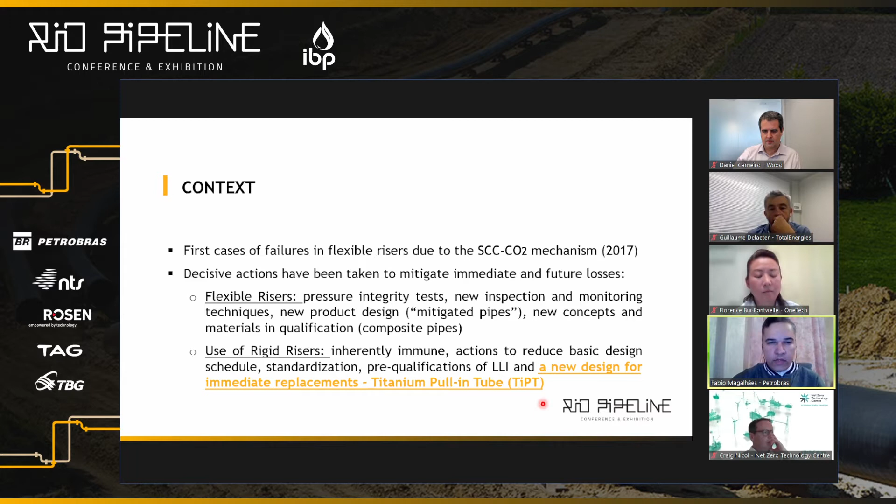And for the replacement of flexible lines with problems, we developed this new concept that we are calling titanium pull-in tube, or TIPT. This technology is based on the titanium stress joint technology, of which several are already installed around the world since the 90s.

Several aspects of this technology are based on our experience with flexible riser design in terms of interface with the platform, the balcony and the support interface and the top hang-off interface, and some testing for the material and the coating of the flexible risers.

But also we carried out an extensive feasibility study on the TIPT technology inside Petrobras, with several tests, studies and computer simulations to be sure of some outstanding points related to this technology. We had an interaction with the market, both suppliers of titanium stress joints and also installers, to bring their valuable suggestions and experience to our design.

And all of this we consolidated in a technical specification where we put all the results of the study on design, fabrication, inspection and monitoring that we had learned in these previous years.

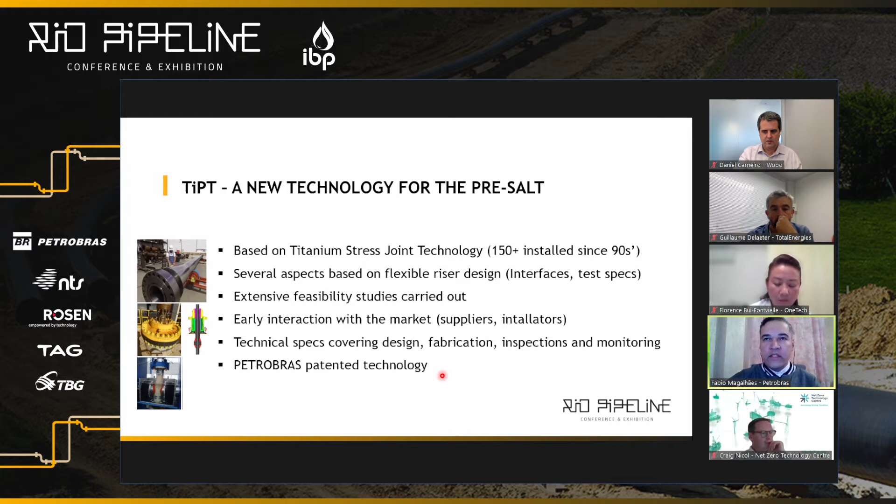And also, this is a patented technology from Petrobras. That doesn't mean that we will prohibit it, on the contrary, it's just to safeguard our intention to continue using this technology. And what is the TIPT? It is a top section of the rigid riser that is made of titanium.

We have the TIPT, titanium string here, that is welded on the rigid riser that we know from the previous projects. And we have here two stress joints that we call the lower and the upper stress joint. The lower one is necessary to resist the dynamic movement of the platform here on the bottom part, and the upper stress joint is used to resist the permanent bending of the TIPT in the passage on the support, completed with titanium pipe section connected with flange.

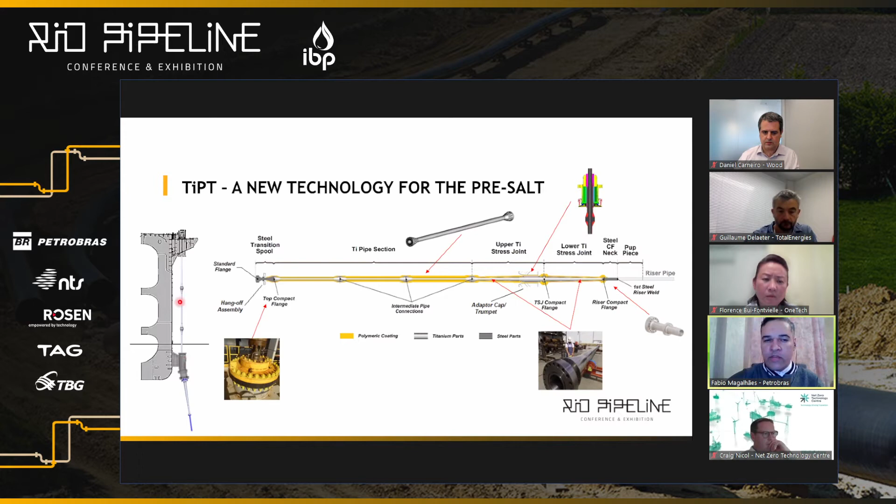And both terminations are made of carbon steel pieces that are internally cladded to resist the fluid contaminants, and also the interface is based on flexible riser technology. The idea is not to have a modification on the support and the platform anyway. And the advantage that we have is a definitive solution immune to the SCC-CO2 phenomenon, like the rigid riser with CRA, corrosion resistant alloy inside, and the titanium itself is resistant.

This technology does not require production or injection stops to perform the integrity tests, so we gain time. We don't need this. It reduces the risk of failure on the annulus fluid, because it doesn't have this problem. This is for new projects. The technology doesn't require modification on the platform, the support and the pull-in system compared with a full flexible design. So it is interchangeable with flexible and rigid projects by using TIPT on the top connection.

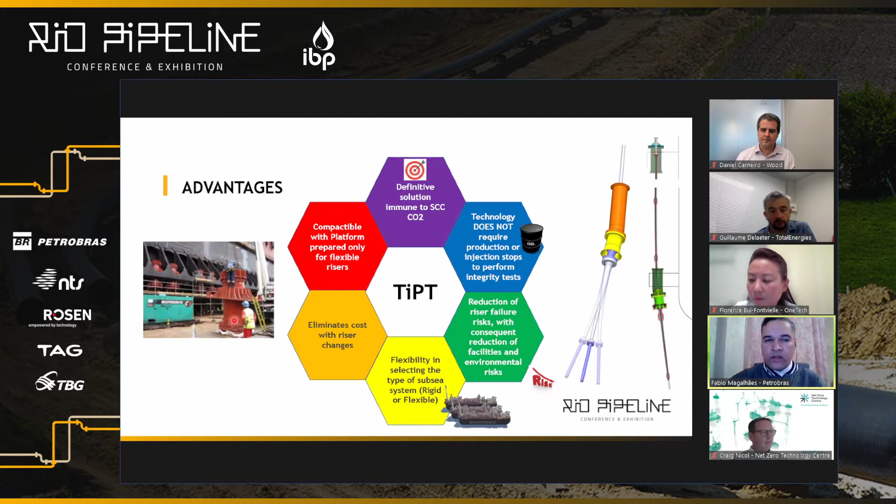It also eliminates cost with the riser change when the flexible risers don't support the load and are seriously damaged, and it is compatible with platforms prepared only for flexible risers. The support, then no spool hard pipe here, no auxiliary system also. It's not needed for flexible riser and not even for TIPT riser, rigid riser.

But we have some outstanding technical issues that we have to address, and we did that. Here is the list: the inner diameter up to 8 inch. That doesn't mean that we couldn't reach more, but the more we increase the diameter, the more the stiffness of the titanium piece increases and induces more loads on the support. And there is some problem, so we don't have to reach much more than 8 inch inner diameter.

For gas injection and oil production lines, which are the target of this technology's main use, we have some contaminants beside the CO2, the sulfide content, and the high temperature that lead to using the more resistant titanium grades to resist these conditions. And also the use on highly dynamic floating units, the FPSO, since the use of stress joints is normally on more static units like SPAR, TLP, even semi, but not normally on FPSO, so we had to address this question on the loads and fatigue issues on the top of the riser and the support.

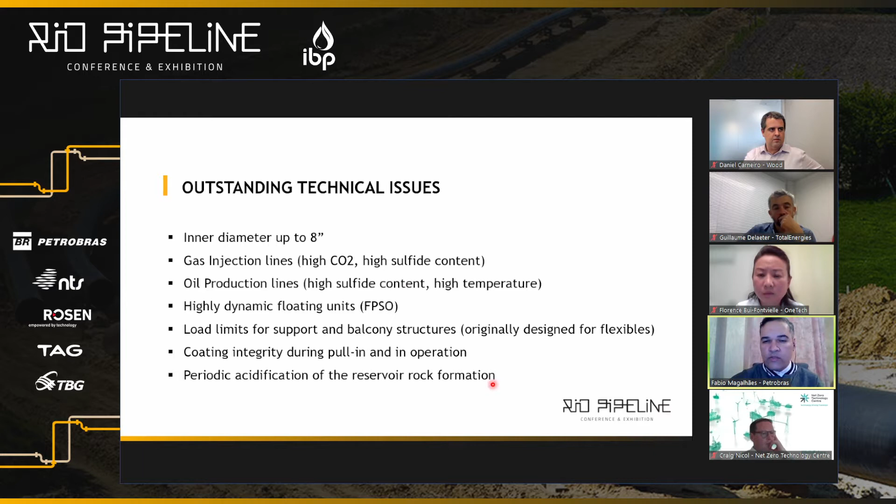And the periodic acidification of the reservoir, where we use inorganic acid which is stronger, like hydrochloric acid, and the compatibility of the metal has to be checked, and it was. But also we made several evaluations on riser global analysis, the configuration of the projects that we proposed, a configuration that is suitable for the field, and staggered risers to minimize the risk of interference, using optimization software to reach some configuration and also the stress joint

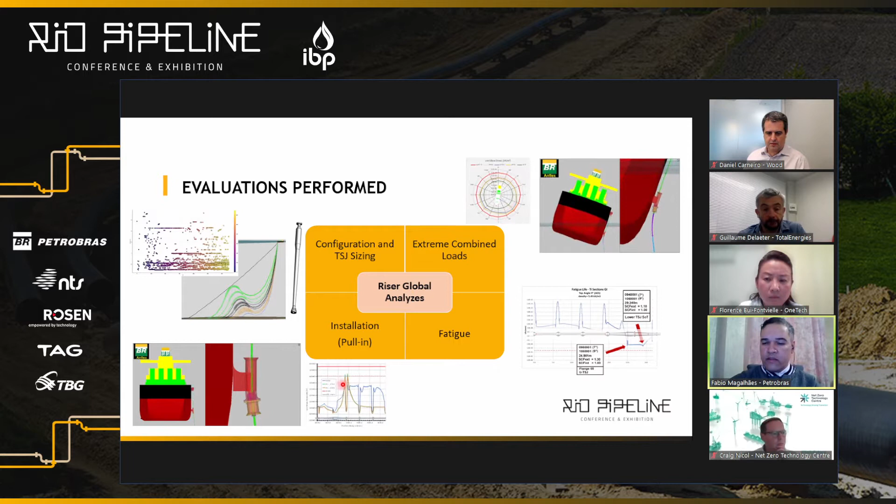dimension. We performed the extreme load, combined loads analysis with several cases, accidental, extreme and operational cases, and addressed fatigue analysis of the riser. Here is a figure of the top of the riser, the TiPT string, where we made a detailed fatigue analysis on this part to be sure. And also the pull-in analysis, when the TiPT is bending during the passage here, and we need to check the utilization for this scenario.

Also, among the components of the TiPT, we had the compact flange, which is a flange designed for dynamic use. There are ISO standards that have the sizing of this flange, but we had to check also to be sure that it is feasible.

The pressure contact on the coating of the TiPT, to have an idea of the loading level here, to study the suitable coating material. We made also ECA on several sections of the TiPT to study the possibility of using welds there, and also the pull-through, where we analyzed the final stage of the decoupling of the TiPT, the upper stress joint, when we have our overload here during the alignment, and also an increase of the pressure here.

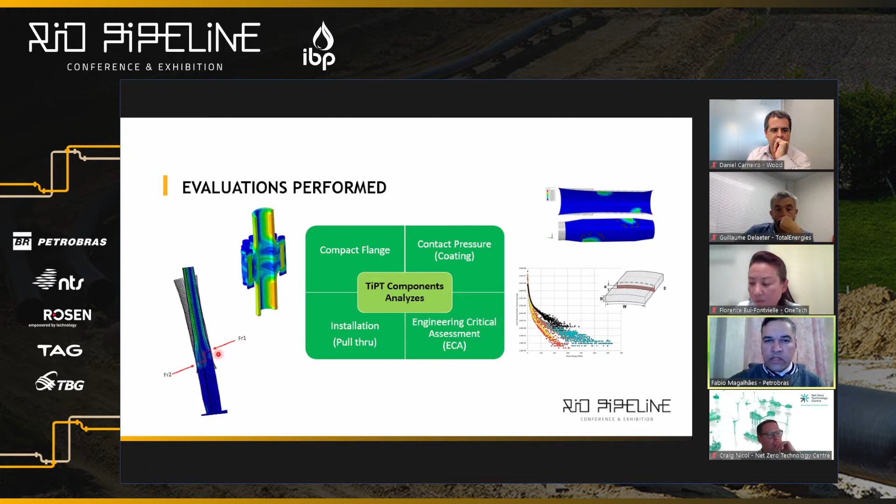It was checked also. And on the FPSO side, as the FPSOs where we intend to use TiPT were prepared for flexible risers, we also checked the balcony structure, the structure itself for each of the balconies of the FPSOs intended for the projects, and also the support structure; the bell mouth of the support is checked for structure, strength, and fatigue also.

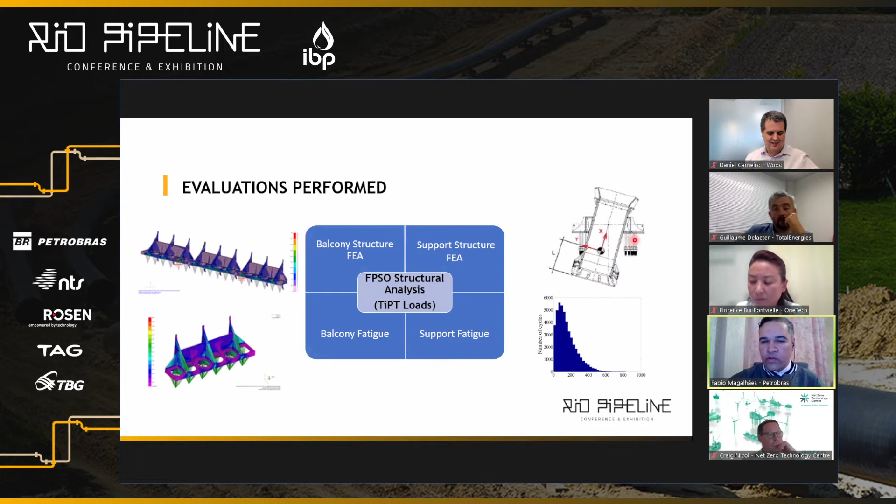And all this resulted in a specification; I listed here the main requirements that we have there: that we use an alloy that is grade F29, resistant to sulfide content and strong inorganic acids also. We specify also unwelded stress joints due to the high dynamic movement. It's hard to inspect by UT during fabrication, so we limit the length of the stress joint for this reason, and the minimal yield strength to overcome the loads that the TiPT is submitted to.

And also for the coating, we specify the wear testing, tribometer polymer pair, and also the full scale test to ensure the feasibility of the coating.

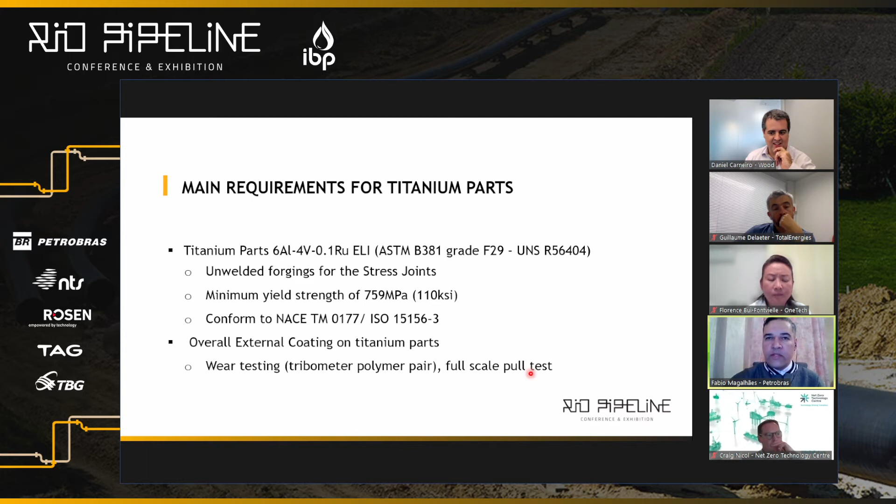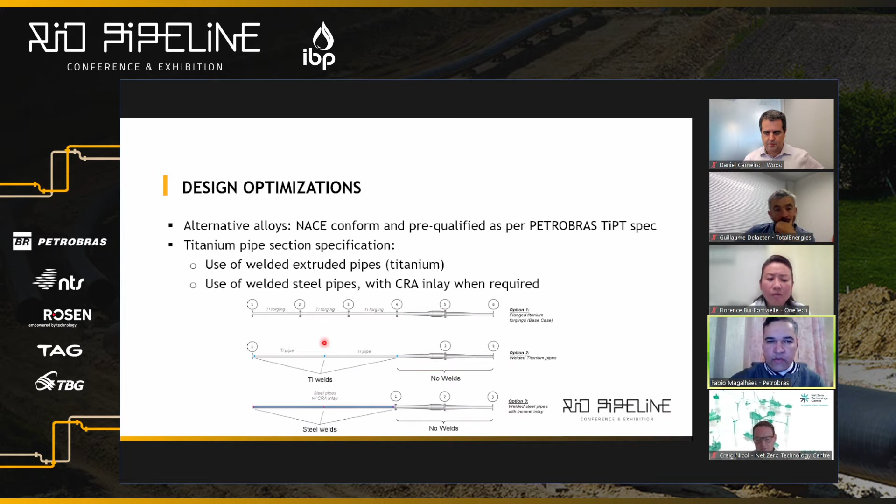Okay, thank you, Daniel. Also some optimizations are being thought of and will be specified in the next project: the use of titanium pipe welded on the static sections, or steel pipes here, reducing the number of flanges and the cost and lead time for this equipment. We have already contracted one project with 5 platforms and 11 risers, or 11 TiPT. It is on the way already.

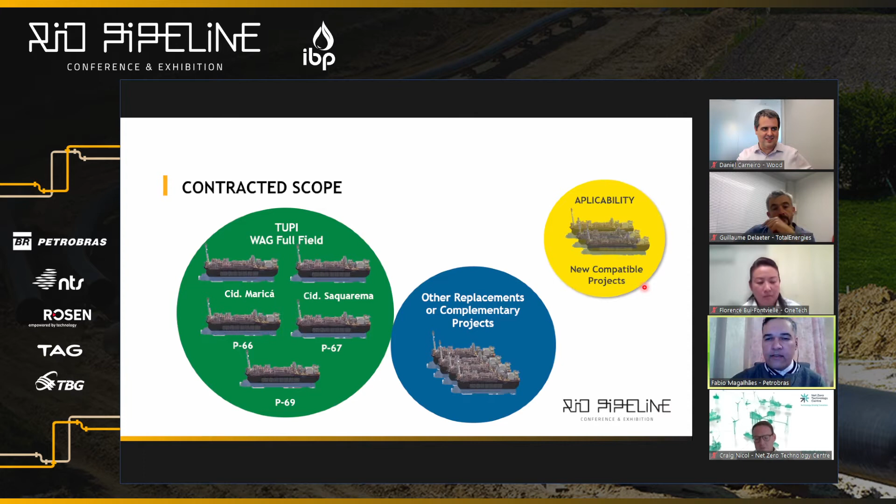Some other replacement or complementary projects are also on the way in basic design. And we are also studying the applicability for new projects, weighing the risks and gains of this technology for new projects.

So in conclusion, we can conclude the excellent SCC CO2 resistance of this technology to replace the flexible riser. It's suitable for installation in FPSOs originally designed for flexible risers. The studies all showed this. It increases the safety of the operation because it eliminates the risk of failure of the flexible, and production and injection loss during integrity tests.

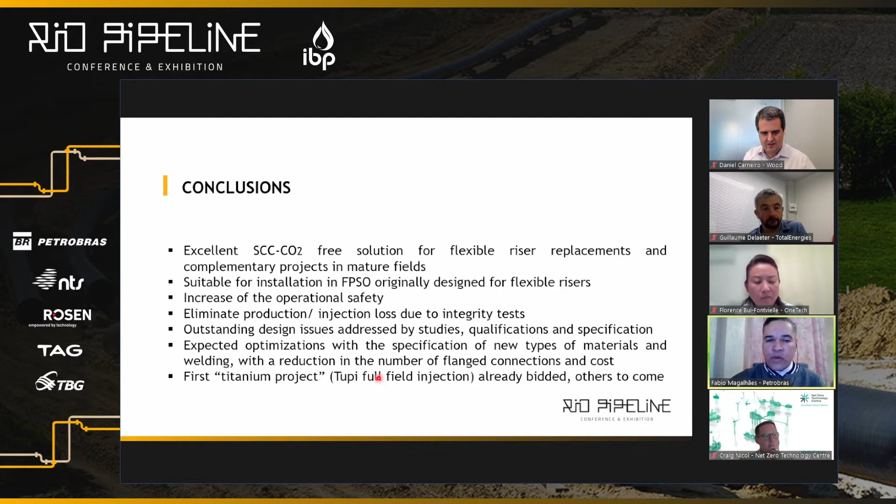All the outstanding issues that I said were addressed through study and qualification, and were also always included in the specification. And we have this expected optimization that we will specify in the next version of the specification, which is expected to reduce costs. And this first titanium project is already bid, and others are to come. So that's it. Thank you for your attention.

Brilliant opening paper from Fabio. I have to admit mine's going to be a little less technical and a little bit more of an oversight. So here goes. But thanks, Fabio. That was really interesting.

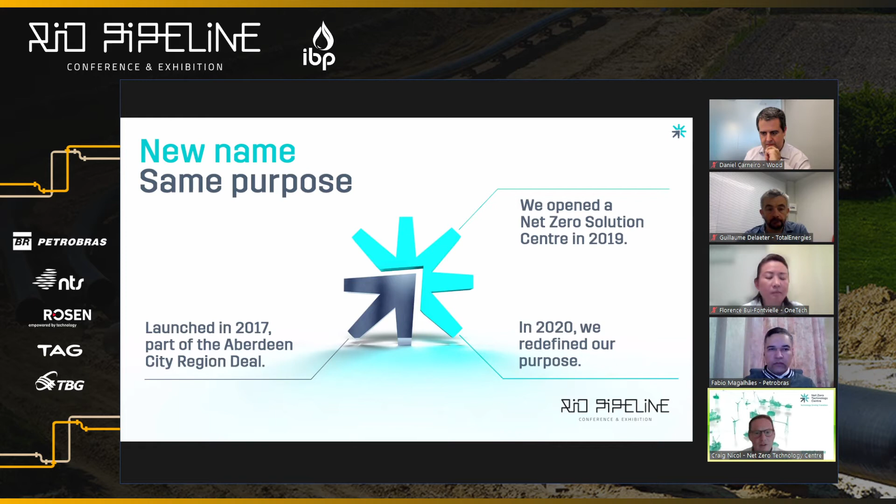So firstly, a quick introduction to what the Net Zero Technology Centre does. We're based here in Aberdeen, Scotland. We opened back in 2017 as the Oil and Gas Technology Centre, the OGTC, if you might have heard of us in a few different guises, but we have since changed our name to the Net Zero Technology Centre, or NZTC, following in line with our passion and aim within the industry.

So effectively we try and do it in 3 separate topics: enabling, accelerating and inspiring the development and deployment of new technologies for an affordable net zero.

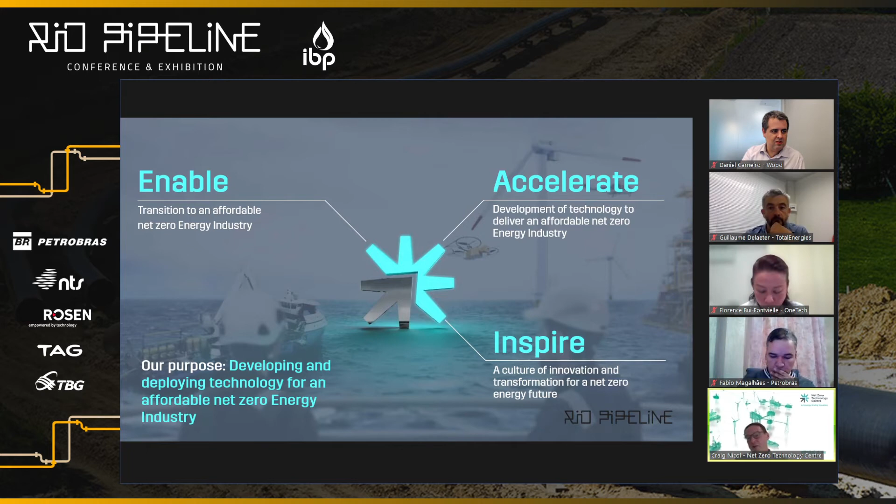Net zero has been spoken about massively globally at the moment, and there's a massive push, certainly within the UKCS, to drive down the carbon footprint left by the energy sector and to reach that net zero aspiration we have by around 2050. So that is why the NZTC exists.

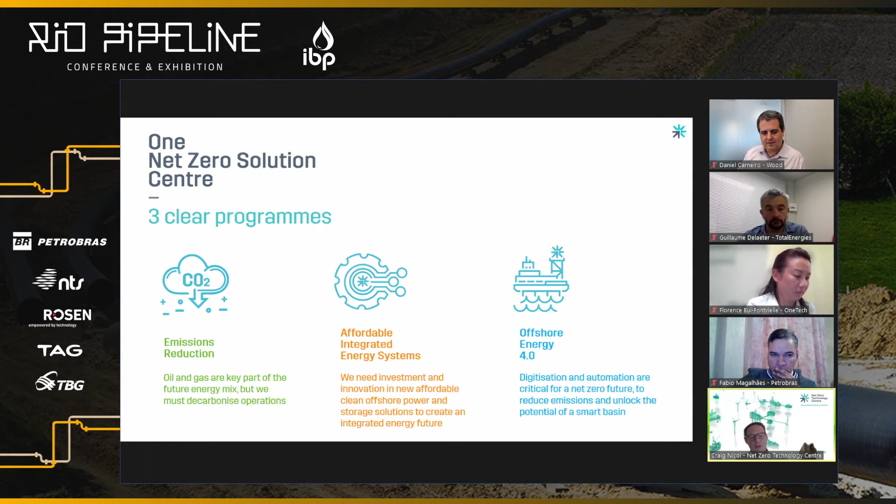We're broken down into 3 main categories: emissions reduction, affordable integrated energy systems, and offshore energy 4.0, which is very digitalized and automation focused. My team for late life asset integrity and decommissioning activities sits within emissions reduction, so we will focus on that today.

This is shown in a slightly different format. This breaks down that late life and decommissioning, as well as production operations and logistics etc., sits within the emissions reduction team.

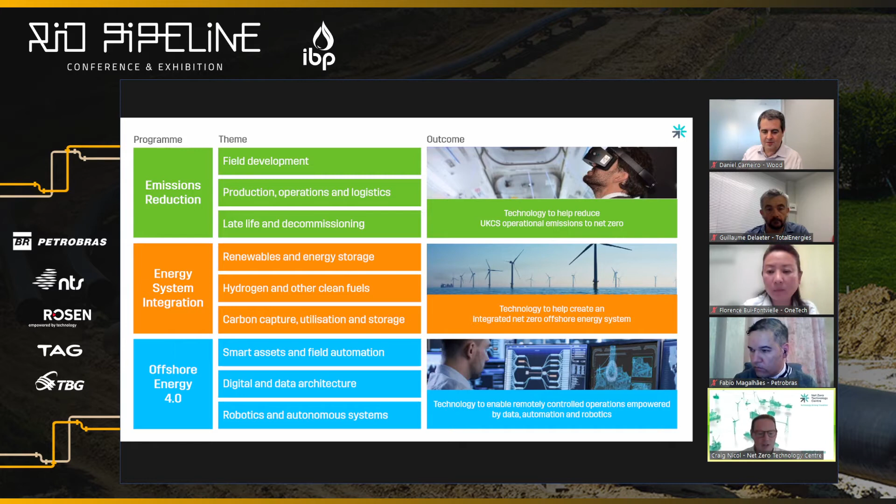We have major developments in hydrogen, carbon capture and storage planned. Some of the existing pipelines will be suitable for hydrogen transport, as well as carbon and CO2 transport also. This gives us a two-pronged attack at pipelines in general within the Technology Centre, because although we have a significant economic benefit to reusing and repurposing these pipelines, there is also still a keen focus on the infrastructure that needs to be removed.

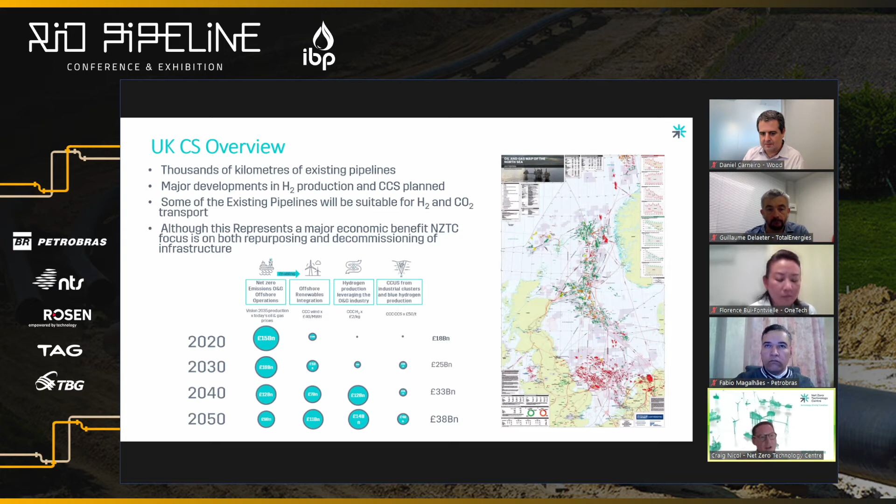So I'm going to give a quick overview of what that looks like within the centre. Sitting within the energy sector, we have multiple tech developers, existing tier one contractors, right down to single personnel companies starting up with a new idea, coming through our doors asking to be supported with new technologies and innovations that they have.

So at the moment we are focusing on getting clearer definition within the UK regulator and for a start, for the UKCS, to make sure that the decommissioning of these pipelines is actually going to be a significant focus area going forward in the future.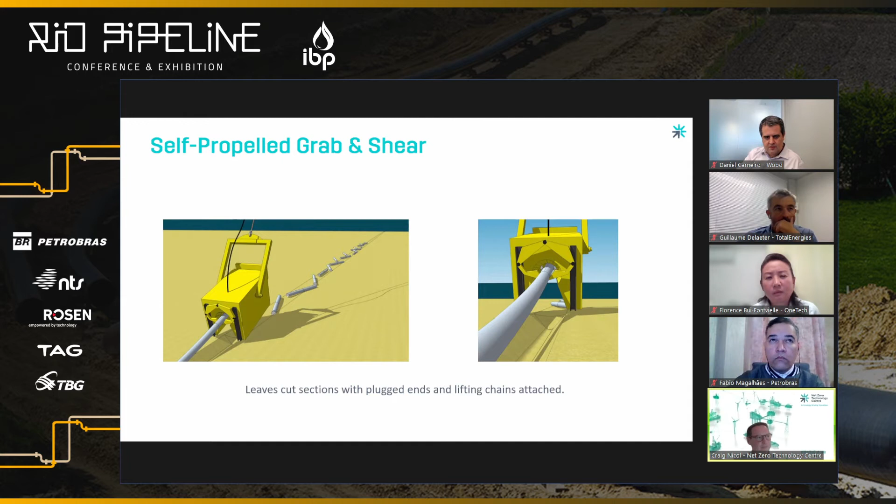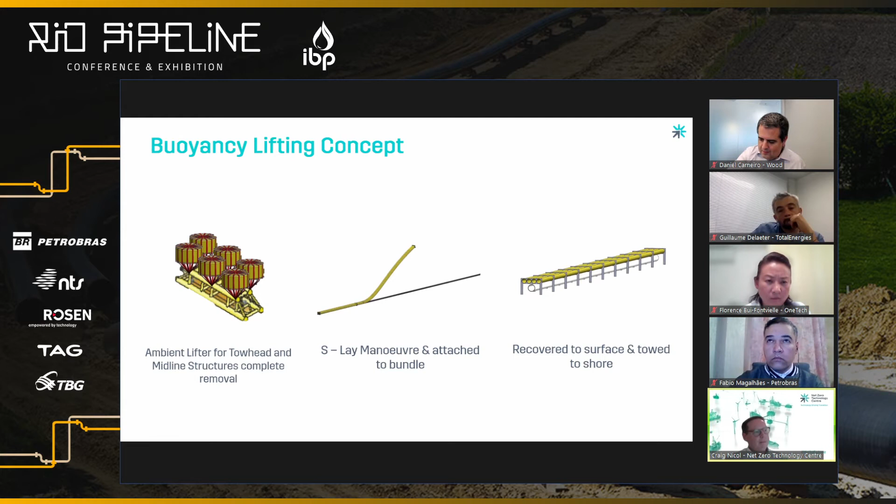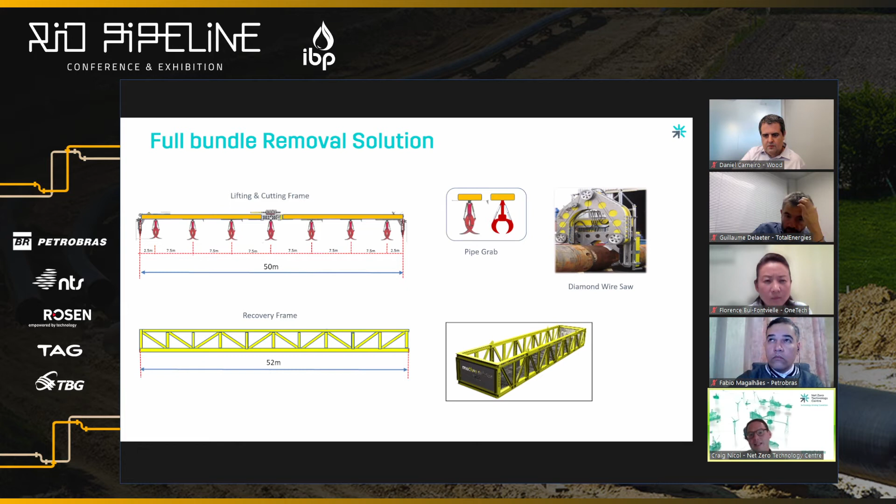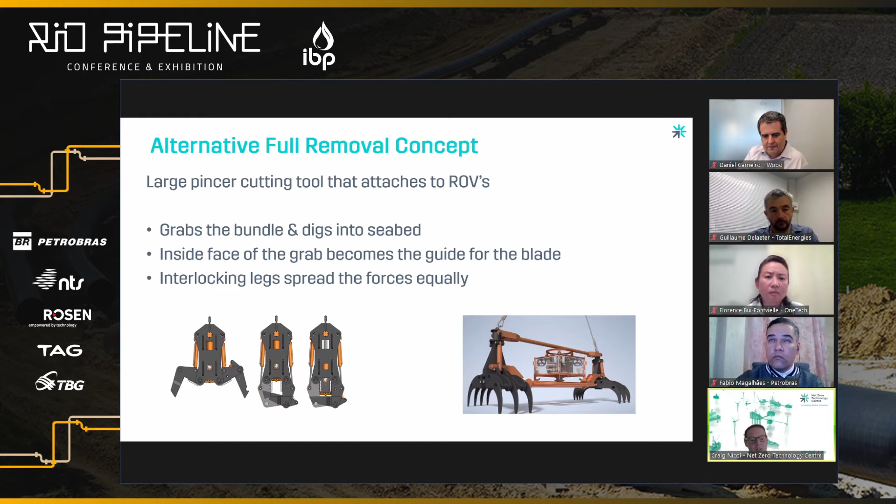So to help us along the journey, that was just a few examples of methodologies and approaches that we could take, and they're very applicable globally as well. We're really keen to discuss further with anybody that's interested in what we're working on in this space.

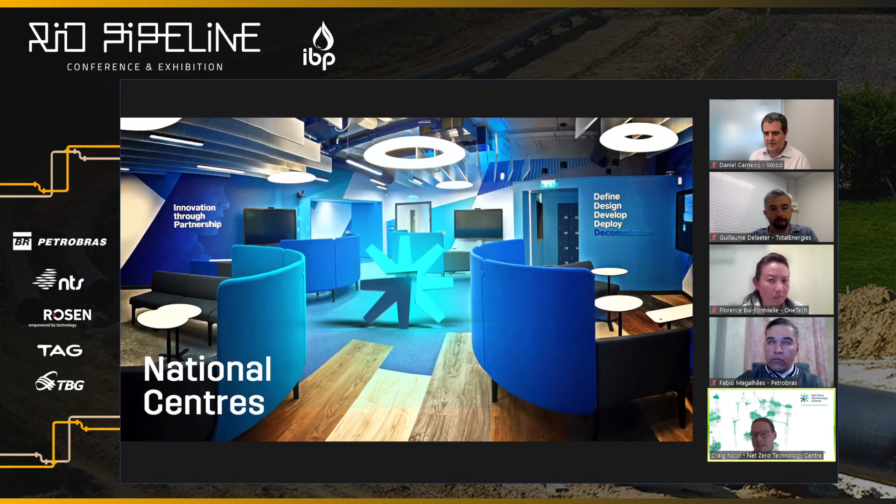But I would really like to introduce the academic partnerships that we have within NZTC. One being the National Decommissioning Centre, a purpose-built centre based here in Aberdeen, a partnership between Aberdeen University and ourselves. There has been a £12 million investment in this centre, and it has cutting-edge tools and techniques to help the industry innovate and harvest new ideas, including a new £2.5 million simulator and smart basin that we can offer to industry as required.

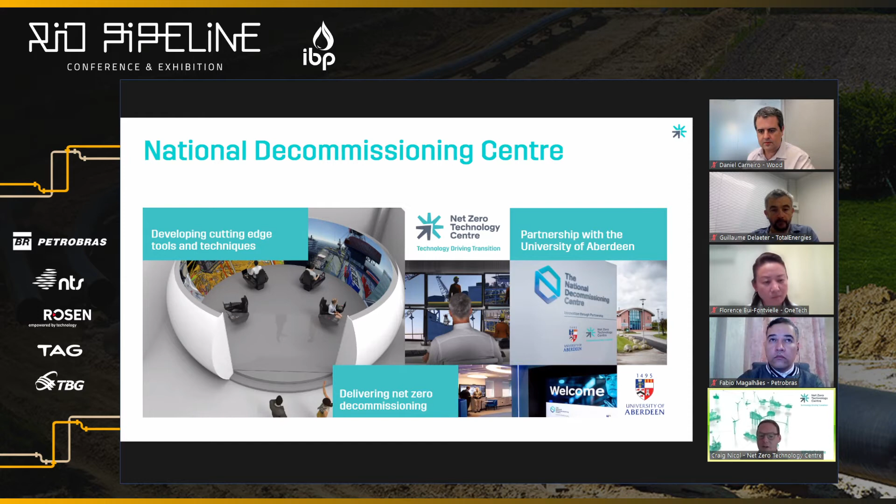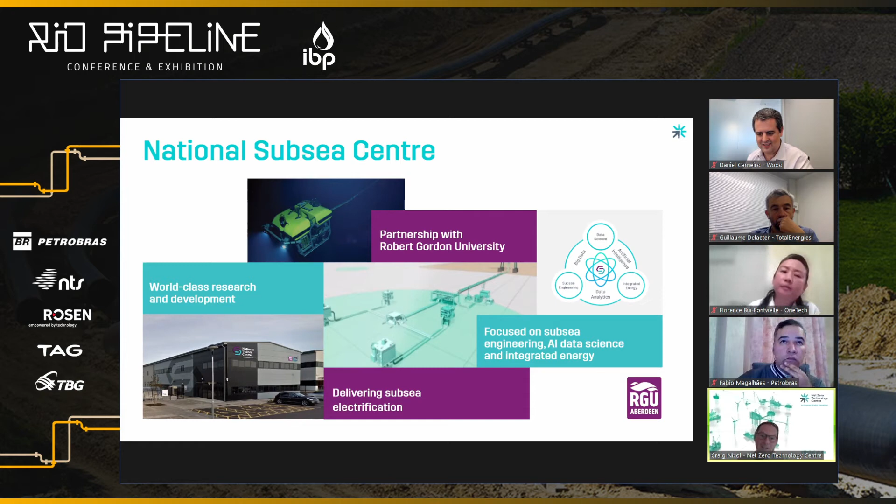We also have a separate partnership with Robert Gordon University in Aberdeen, the National Subsea Centre. A very similar arrangement, but this is connecting industry with academic expertise and research projects. I urge you to look into it a bit more if there's anything on the subsea side that you might want a PhD student, etc., to work on.

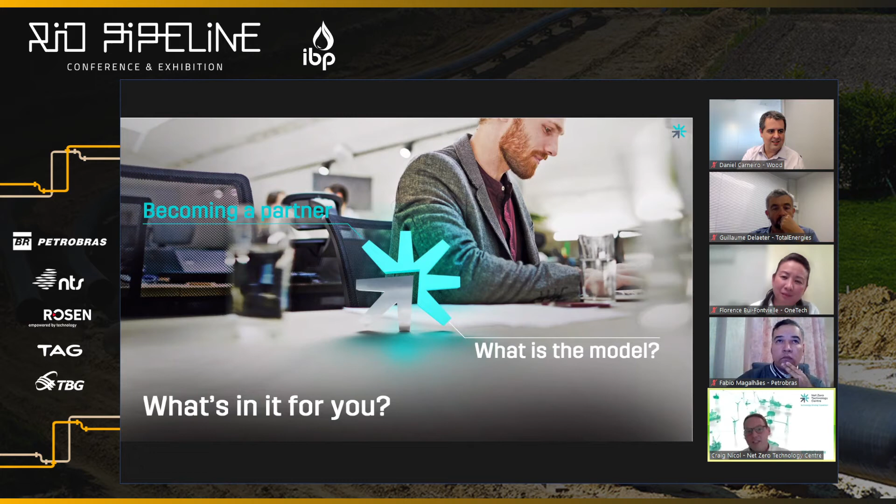So if you want to become a partner of the Net Zero Technology Centre, there are different models. We have strategic partners, which is effectively a pay-to-play subscription, but we also have program partners and associate partners, who are effectively people in industry that have a problem that needs solved. We can engage the global supply chain and make sure we shape the future of the technology and gain access to any of the technology projects ongoing in that space.

Thanks very much. It's been a very fast introduction and overview of what we've done. I was very conscious of time, so I think I've made up a bit of time there for you, Daniel. Yes, brilliant, really appreciate that. Thanks, Craig, for the very interesting presentation and the interesting toys you presented.

Let's then move on to the third presentation, and we'll come back for questions at the end. The third presentation will be done jointly by Florence Bui-Fontrielle and Guillaume Delaeter.

Florence joined Total Energies in 2009 after 13 years in Vinci Energies Group, contributing to various large industrial and E&P projects. She's now head of the new projects department in Total Energies EP Congo, involved in offshore platform refurbishing and terminal upgrading. She worked in different positions on projects in the North Sea and Angola, and integrated the Congo project in 2015 as project manager for SURF activities. Since last summer, she took on the lead for the entity in charge of project assurance within the technical line of projects of OneTech.

Guillaume is a graduate from École Supérieure des Ingénieurs de Marseille and has been working for Total Energies since 2003. He is specialized in offshore deep water developments and is presently head of the subsea, umbilical, risers and flow lines department for Project Brownfield at Total Energies EP Angola. He previously worked on the Girasol and Rosa projects.

Thank you, Daniel. I will try to be quick on the presentation of Kaombo Development Project. Kaombo Development is a deep offshore oil development. The development area is located on Block 32 in Angola, and Total Energy is the operator of this venture. The water depth of this development is between 1,400 meters to 1,950 meters.

On Kaombo field, there are 9 reservoirs of Oligocene and Miocene oil. Only 6 of them are currently produced with 2 FPSOs, which are converted FPSOs with turret mooring. Just one thing, Kaombo means spice, so it's not a common project that we have to perform.

The project FID was taken in 2014. The first FPSO, Kaombo North, arrived in 2018, and the second one in 2019. Just one thing, the project strategy for the SURF activity was to deliver the overall subsea network for both FPSOs before the arrival of the first FPSO on site.

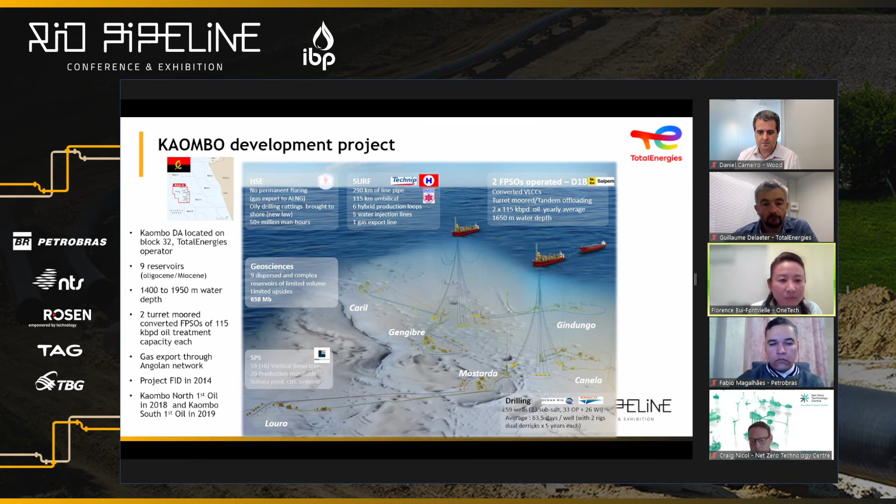So just to explain the subsea field schematic for both FPSOs. For both FPSO, the subsea configuration is the same. We have 3 hybrid loops of 10 to 12-inch internal diameter with 1 production pipeline and 1 service line, both lines in carbon steel.

10 manifolds are connected to the production line. With these 3 hybrid loops, we have 3 water injection lines, 14-inch each of carbon steel, and 1 gas export line, 10-inch, also in carbon steel. All these flow lines are connected to the FPSO.

They connect with STTR risers, connected to the turret via 12 flexible jumpers, and in total, 3 main umbilicals connected to the FPSO.

In terms of lines, it's a very large project. If we totalize the two subsea networks of FPSO North and South, we had 300 kilometers of flow line, 120 kilometers of umbilical, 18 risers, and almost 100 FLETs and ILTs to be installed for this Kaombo subsea network.

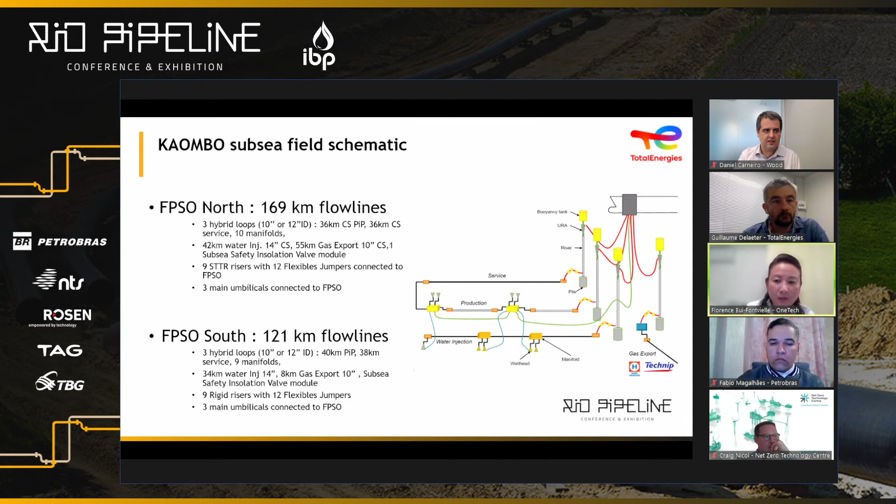For a word about the Kaombo subsea layout, the study was also structured for the definition of the routing and the location of the subsea structures due to several geohazards. The two main difficulties we had to manage were the presence of active pockmarks in the vicinity of the structures to be located, and the instabilities we had to avoid when the slope of the seabed comes over 5 degrees. These geohazards really drove the layout and the routing of the flow lines.

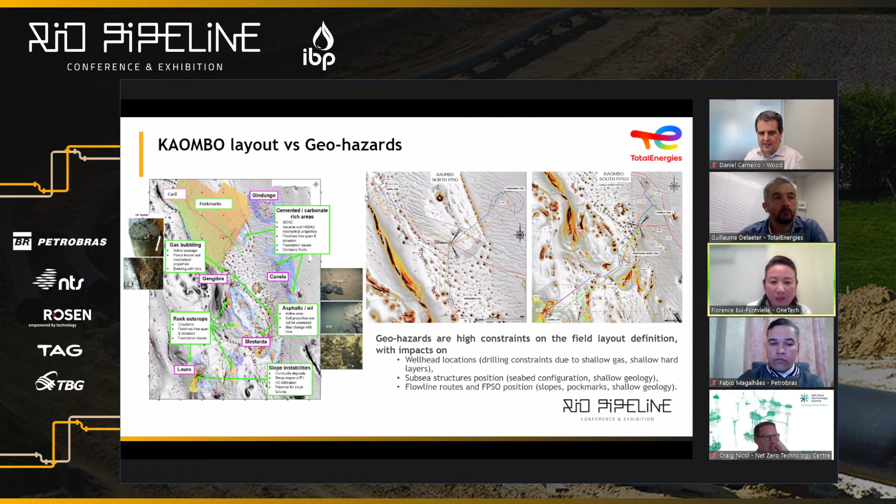The FLETs and ILTs were fabricated at Schwartz-Hautmont in Spain. We have in Europe the fabrication of the flexibles in Le Trait, the fabrication of the riser structures, upper and lower, in Isleburn, UK, and in Lamprell Yard, Dubai, we have the buoyancy tank manufacturing.

A big part of the construction was also made in Angola: the dynamic umbilicals at Angoflex in Angola, double joints for the single line at Dande Spoolbase, and the rigid spools fabricated at Heerema Yard in Porto Amboim.

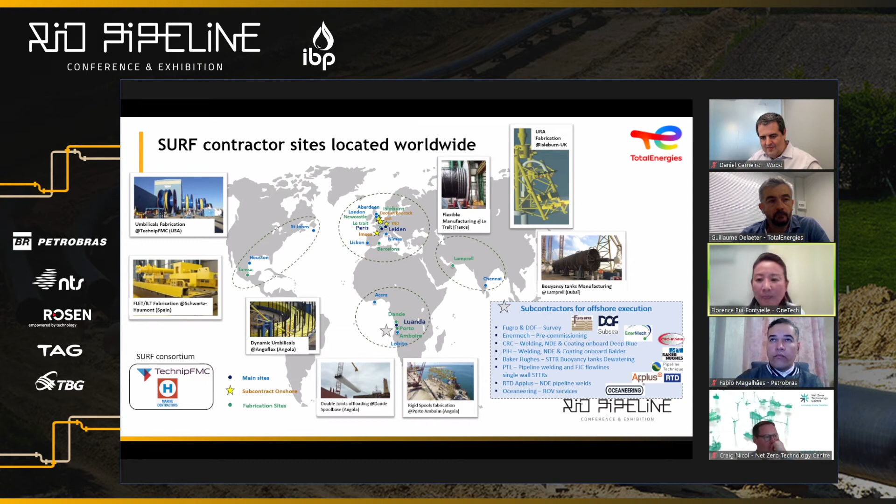Thank you, Florence. Another challenge for Kaombo was logistics. The logistics was a challenge because we have a worldwide fabrication area, a large quantity of equipment to be transported, and also a large number of persons to be sent to Angola and then offshore.

From the international fabrication yards, we organized the transportation of equipment via dedicated HLV or via cargo liner. Once arrived in Angola, we did marshalling activity at different locations in Angola: Porto Amboim, Dande, Luanda, but also Lobito.

And after, to transfer the equipment when they are ready to be transferred offshore, we use cargo barge, but also supply vessel. For the transfer of personnel offshore, we use surfer, but also we have done some infield transfer of personnel by

surfer remaining at site. So to give some figure, we transported to Angola 95 FLET and ILT, so subsea structure for flow line. We transported 18 buoyancy tank. We transported from Angola fabrication yard to offshore 60 spool. But also we have done in terms of logistics over 55 vessel temporary importation in Angola.

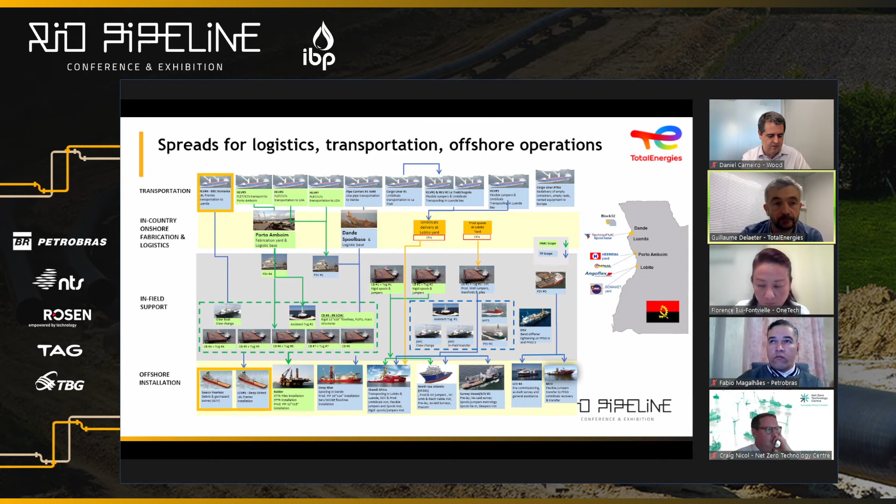Another challenge we have, and it was one of the key, is the fact that we have used the turret FPSO. So the hookup phase was a challenge for us. So we had two FPSO, FPSO North and FPSO South. For each FPSO, we have to transfer to FPSO 12 flexible jumper, but also 4 dynamic umbilical that were wet stored before FPSO arrival. The main challenge was for flexible jumper because we have to connect the flexible jumper at the top of the rigid riser.

And it was the first diverless connection for a flexible jumper to a top of riser. So the main challenge is coming from the fact that we have to stroke from bottom to top. So we have developed an intensive qualification program and also an intensive SIT program in order to be sure that all is operational when needed offshore.

Another challenge we had during the hookup phase was to manage the clash between the installation vessel of the flexible jumper and umbilical and the FPSO, because it's a turret FPSO, so the FPSO is turning around the turret. So in order to manage this clash, we had to control the heading of the FPSO by tug.

The other challenge for hookup phase was the congested turret we had, because it's a big turret with 18 slots. And on the 18 slots, we use 16 slots for flexible jumper and umbilical. So it was congested at the bottom in order to avoid interference, where we installed new riser close to existing one, but it was also congested work at topside to manage the interface between topside work and subsea work in order to avoid standby of SURF vessel, but also in order to optimize the first oil date.

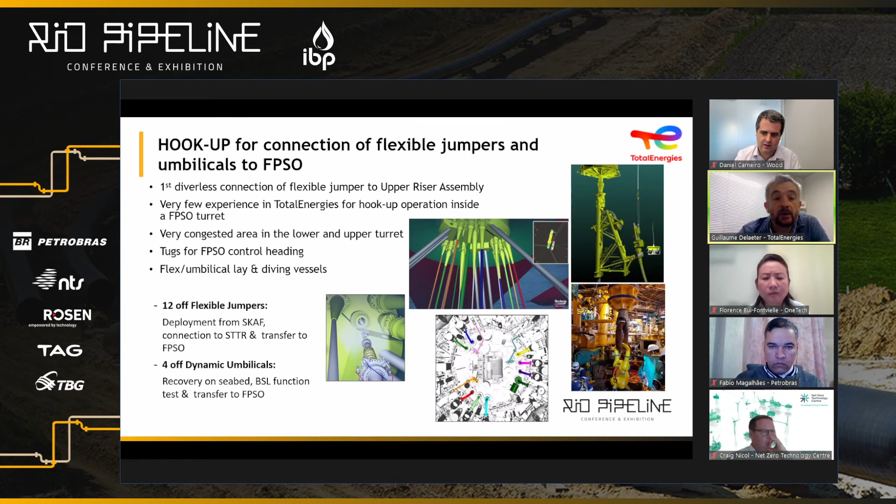We had also to perform diving activity in order to secure the flexible riser at the bottom of the I-tube of the FPSO. So among all this challenge, the HSE was the key challenge due to the duration of the campaign. We had a campaign of approximately 3 years between 2016 and 2019.

We had at some peak 1,000 persons offshore working for Kaombo SURF package. We had up to 5 construction vessels working together at site. We had numerous co-activity to manage. So we had co-activity between SURF vessels, we had co-activity between SURF vessel and FPSO vessel for the control heading, but also for the mooring of the FPSO.

We have co-activity between SURF vessel and also affiliate field support vessel. We had co-activity between SURF vessel and seismic activity at field. Of course, also we had some SIMOPS activity between SURF activity and a live pipeline, because we have to connect the gas export line of Kaombo to a live gas export for another block.

Also, several critical offshore lifts we have to face on Kaombo. For example, we have done 18 double lifts in order to transfer from horizontal to vertical buoyancy tank for the riser. As I said, diving operation at congested turret below FPSO was also an HSE challenge. And at the end, as we have several same type of riser, we had to face repetitive operation and to fight against routine work.

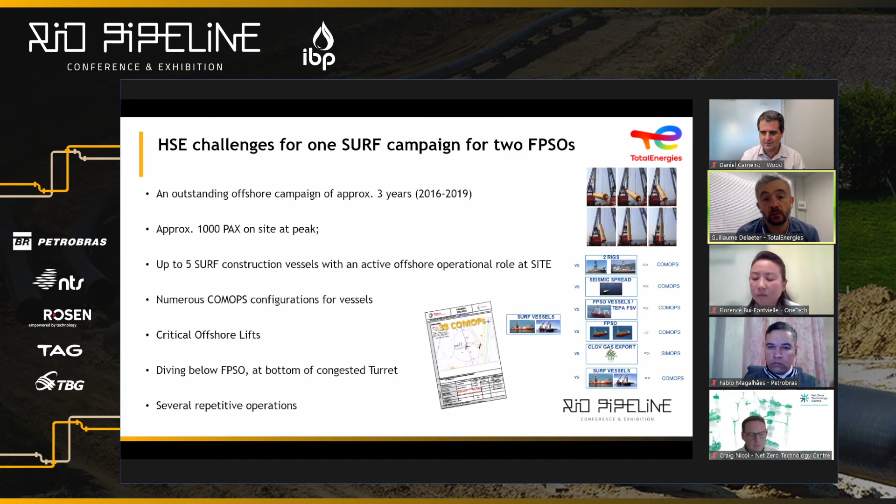So just to give some figure of what was the marine spread during the offshore campaign of Kaombo. Of course we had the two contractors, TechnipFMC and HMC, working as a consortium. So we have for TechnipFMC 5 construction vessels. So Deep Blue for pipe-lay vessel, reel method, up to 240 kilometers of pipeline, more than 200 days of operation.

Scandi Africa was a very efficient vessel at site. It's a multi-purpose vessel working on installation of subsea pile, spool, well jumper, manifold, flexible spool, and umbilical. The Scandi Africa was the main vessel for the hookup phase. Almost 500 days of operation for Scandi Africa.

The North Sea Atlantic was also another MSV vessel working at site for Technip. So we had 14 piles to install with the North Sea Atlantic, 6 manifolds, umbilical, and well jumper. Also, the North Sea Atlantic was helping Deep Blue for initiation transfer of suction pile for initiation of pipeline by Deep Blue.

Technip used 2 LCVs on site. So we had the Bourbon Evolution 803 and Bourbon Evolution 805. It was for installation of light structure, but also flying leads, perform survey, pre-commissioning, and subsea tie-in. For Bourbon 803, almost 300 days of operation, and for Bourbon 805, almost 200 days of operation.

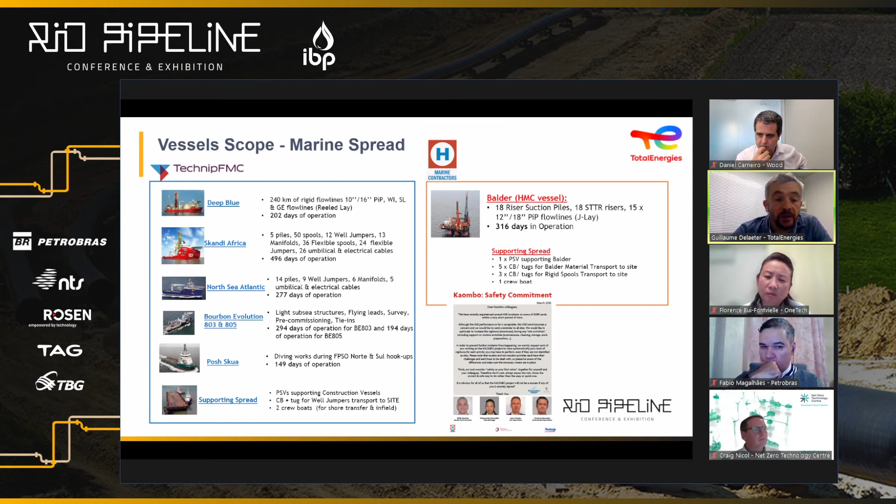So the success of the Kaombo offshore campaign was also the fact that we had to perform almost 1,000 moves of installation vessels or rigs at site, and we had 0 clash. As I said, we worked during 3 years, and we had up to 5 construction vessels at site at the same time. So we used a tool we developed internally within TotalEnergies called Chemin de Fer. It was a common tool, but it was very efficient.

And thanks to the X-week look-ahead planning provided by the SURF contractor, but also thanks to the drilling campaign and the drilling sequence we had from Geoscience and the drilling entity, we managed each week to anticipate and forecast the clashes for the future and to find solutions in order to avoid clashes.

We were helped in this resolution of clashes by the fact that the field was very spread out. We had up to 6 reservoirs. We had good assistance from the SURF contractor to help us slightly adjust the SURF planning. And we also had good assistance from rig and Geoscience in order to have some top-holes at locations where we needed it. A top-hole is when the rig stays 10 days at a location.

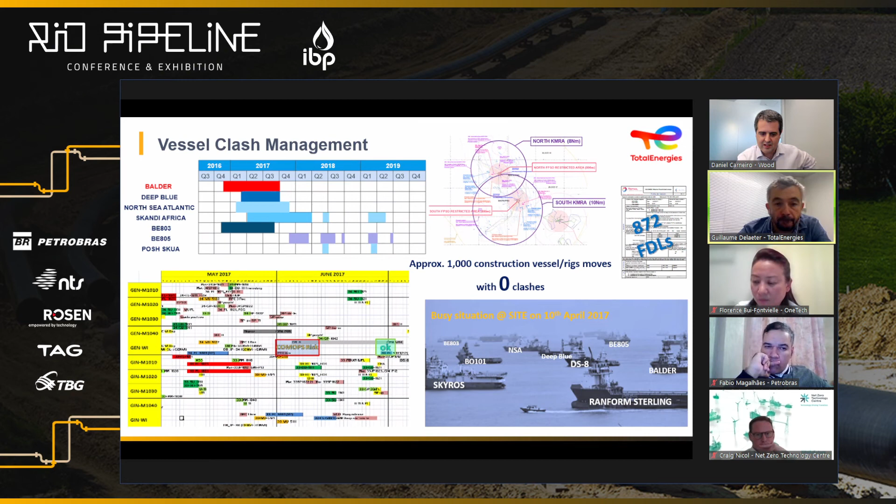Guillaume, if you could try to finish quickly, the time is over.

Yes, just to summarize, the key contributor for the success clearly was a commitment at a high level of the project for HSE performance, and means. Also full cooperation between all the teams, company teams and the consortium team. Of course, we had strong technical and operational skills. And one motto in our project was anticipation and risk management. It was very important to anticipate the risks by having on board, from the risk assessment, the key actors of the offshore campaign, like the offshore construction manager.

And as you have understood, in a repetitive operation, we always have a first in series, and after each first in series, we integrated the lessons learned for the next one. And in such a very long and challenging installation campaign, the team spirit mindset was also paramount to achieve this great job.

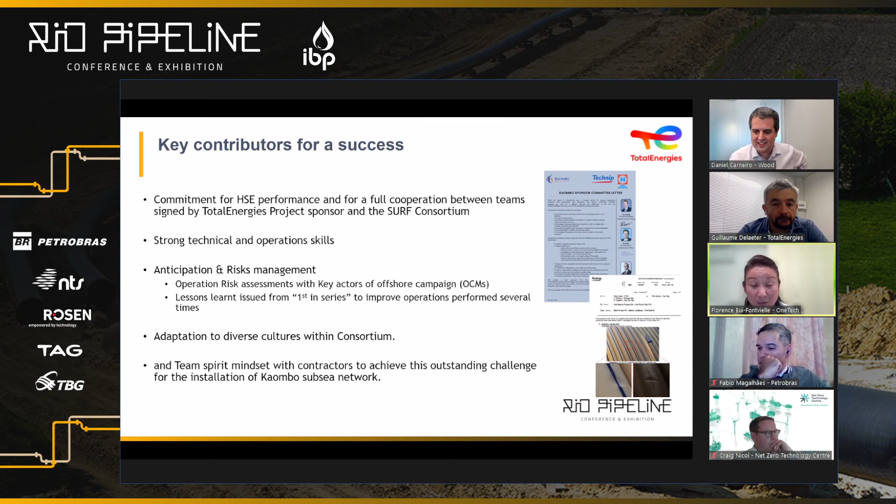So the next challenge in deep offshore after Kaombo is our focus on installation with extreme geohazard and harsh environment. We have more and more on our existing hub the possibility to have a long subsea tie-back, and for that we need a specific pipeline to fight against hydrate formation.

We are also confident to develop a simplified subsea architecture based on a single production line solution that we call MADA. It means that we are confident to have some new design approach against hydrates. So in some conditions, it is possible to adapt the protection of the flow line by having the fluid working in a certain condition outside the area of hydrate formation.

And we also work on new types of pipe resistant to CO2 or H2S with internal CRA pipe. And as we have some fields with high pressure reservoirs, we also need to progress in 20k subsea equipment fabrication, qualification, and installation.

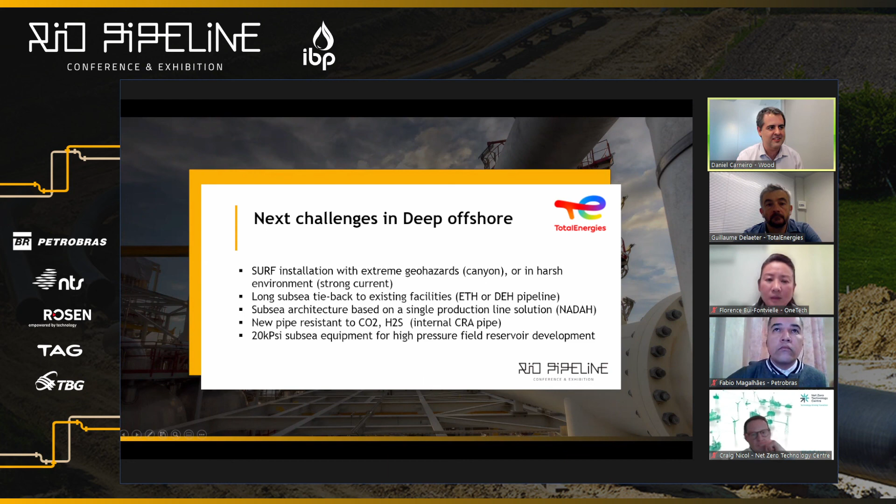So Fabio, titanium is vulnerable to embrittlement caused by hydrogen as a result of CP, cathodic protection. Do you have CP on the titanium transition pieces or the pulling pieces, and how do you deal with that?

Okay, yes, I answered in the chat that yes, we have the CP system of the FPSO, and yes, the titanium is susceptible to embrittlement due to hydrogen from the CP system. It's for this that we use the coating only, but we have the material qualification for this coating, specifying both the material test and also the full scale and other wear tests specifically for this situation, the pulling system, and also some electrical isolation on the top, and then the studs. So we have several safeguards for this mode of failure.

Thank you very much. So just rushing here to Craig. Craig, which of the different methods that you showed are field proven, or at least close to being there, or at least proven by analogy? I was curious about that. They've all been used now in commercial environments. So I wouldn't be one to judge. I have to stay on the fence with it all, but they all worked very well, with added benefits to the end user in all guises. So they have now all been commercialized.